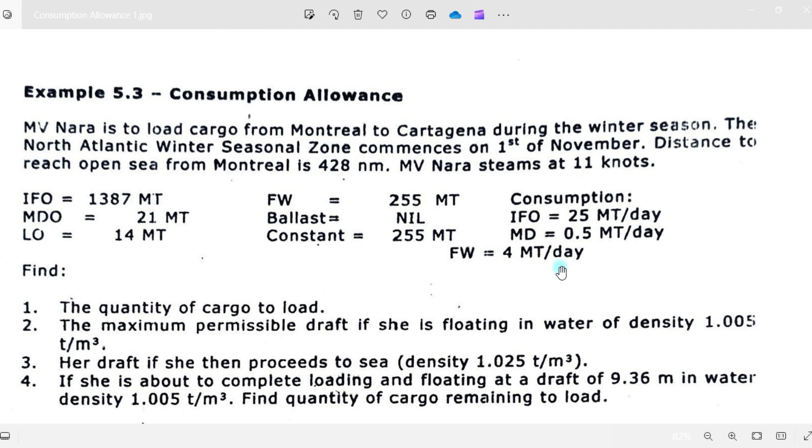Okay, this is the question. Find number 1, the quantity of cargo to load, meaning the maximum cargo to load when he is at the loading port. The maximum permissible draft if she is floating in water of density 1.005.

So what will be her draft if she floats in dock water of density 1.005? Her draft if she then proceeds to sea density of 1.025 - what will be her draft when she floats in salt water of density 1.025?

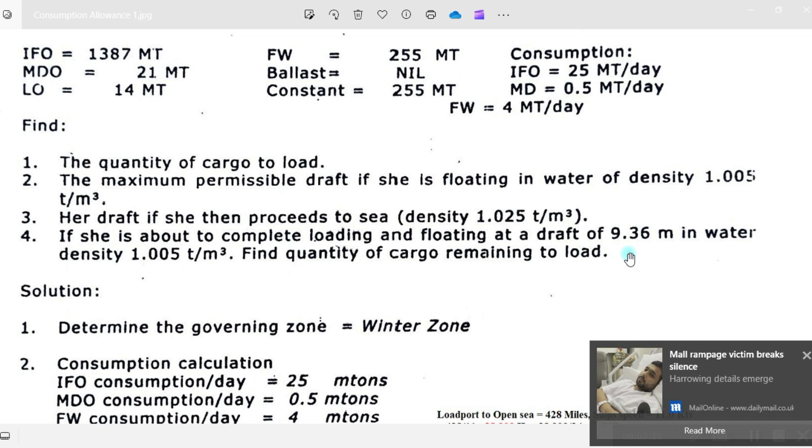If she's about to complete loading and floating at a draft of 9.36, meaning she will stop loading at 9.36 to get the remaining cargo, the local density or dock water when she reaches 9.36 meters is 1.005 tons per cubic meter.

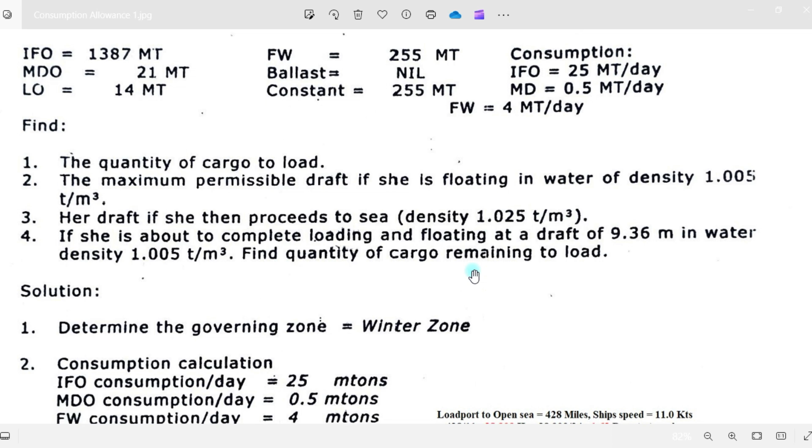And find the quantity of remaining cargo to load. So what will be the remaining cargo to load? Solution.

Determining zone: it is winter zone. So winter zone will be here, and this maximum draft will be 9.351, and displacement will be 30183. Okay, his light ship is 6772. So that will be the winter zone.

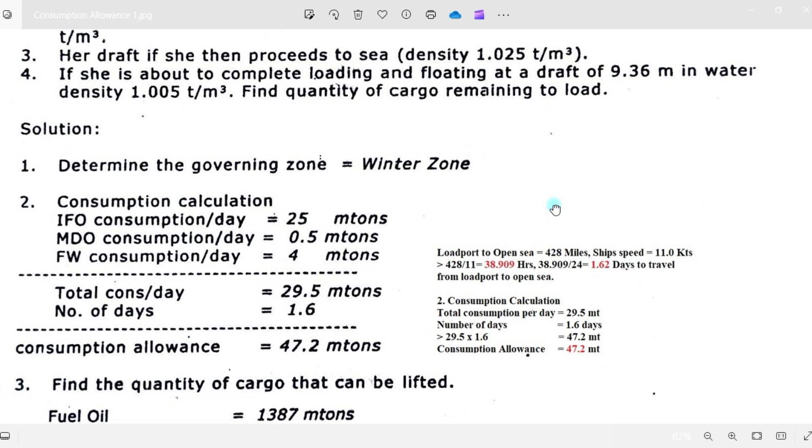Consumption calculations. FO consumption per day is 25 tons. DO consumption per day is 0.5 tons, and freshwater consumption per day is 4 tons. So you total all the consumptions, then total consumption per day will be 29.5 metric tons.

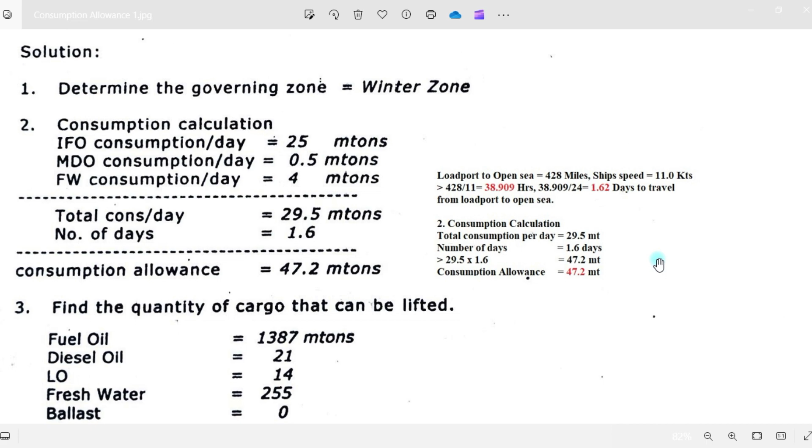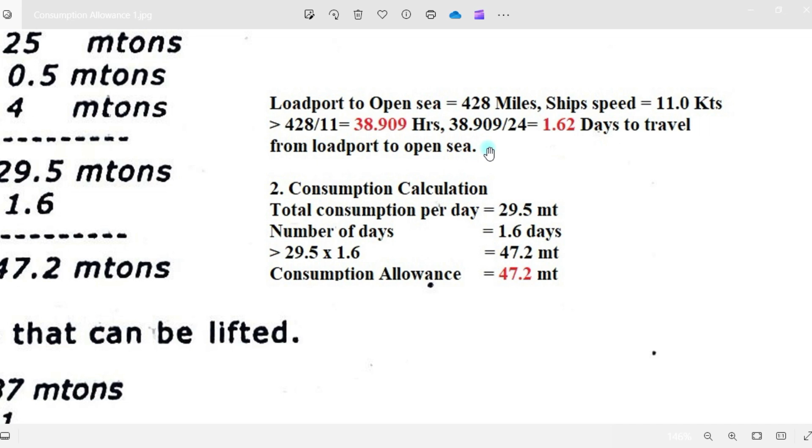Let's make this a little bit bigger. Okay, so load port to open sea, the distance is 428 miles and she has a speed of 11 knots. So with this distance from load port to open sea, you divide it by the speed of the vessel, which is 11, so that will be 38.909 hours. So with this number of hours of 38.909, divide it by 24, and you will have 1.62 days to travel from load port to open sea.

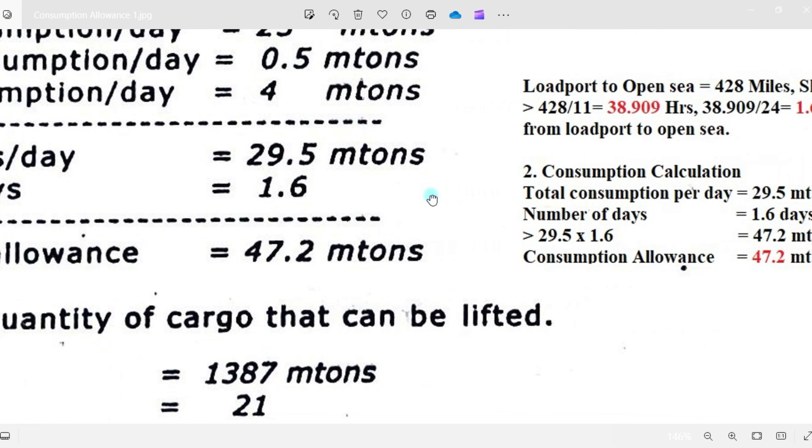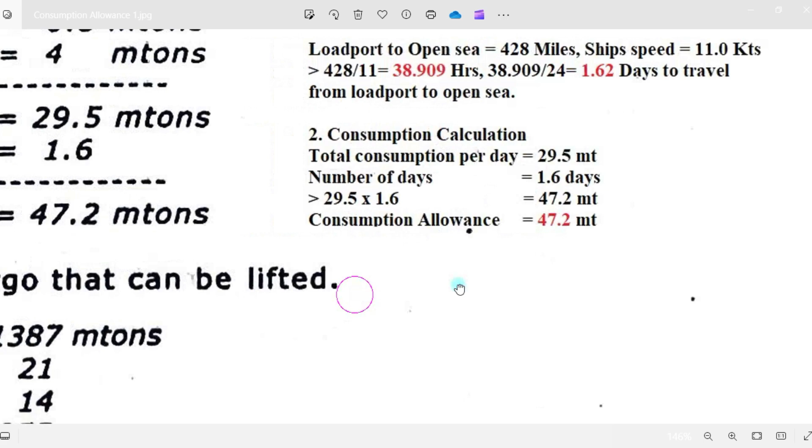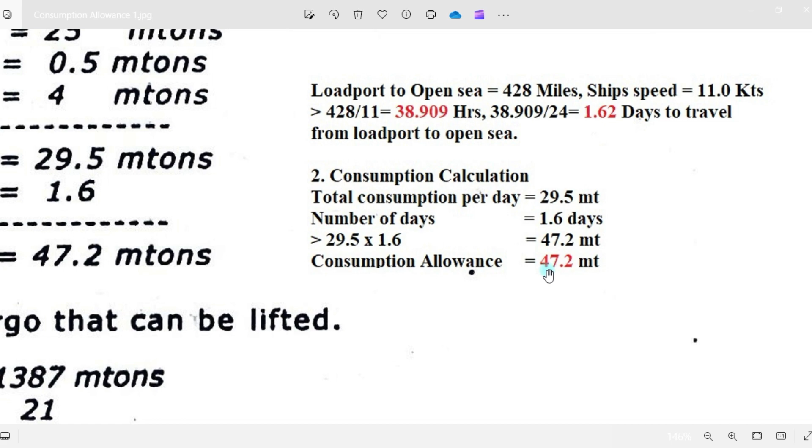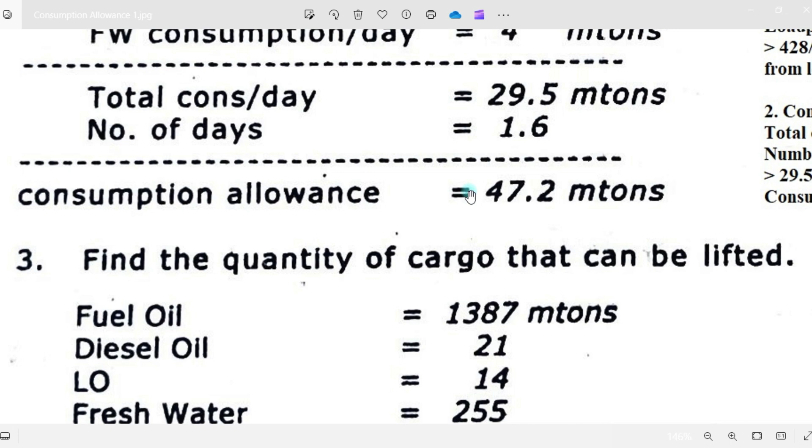Consumption calculation: total consumption per day is 29.5, and the number of days to travel from load port to open sea is 1.6 days. So the total consumption times number of days to travel, you will have total allowance of 47.2 metric tons. That will be what we call consumption allowance. So 29.5 multiplied by 1.6, you will have a consumption allowance of 47.2 metric tons.

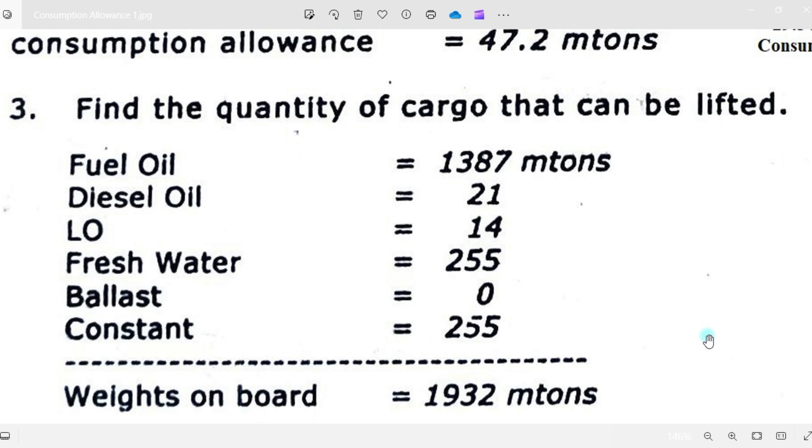So find the quantity of cargo that can be lifted, meaning add all the ROBs, your remaining on board. So fuel will be 1387, diesel oil is 21, lube oil is 14 tons, fresh water is 255, ballast 0, constant is 255. So a total weights on board is 1932. That will be your ROB.

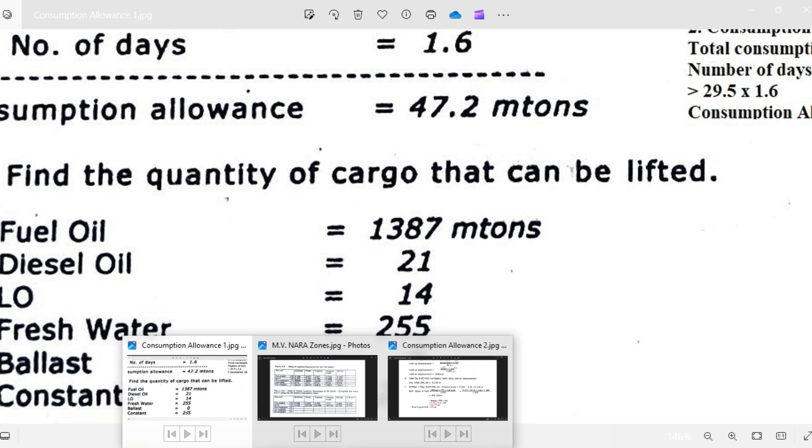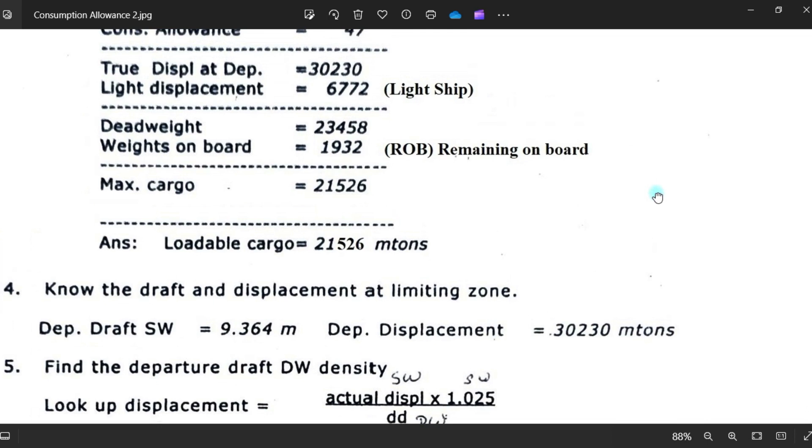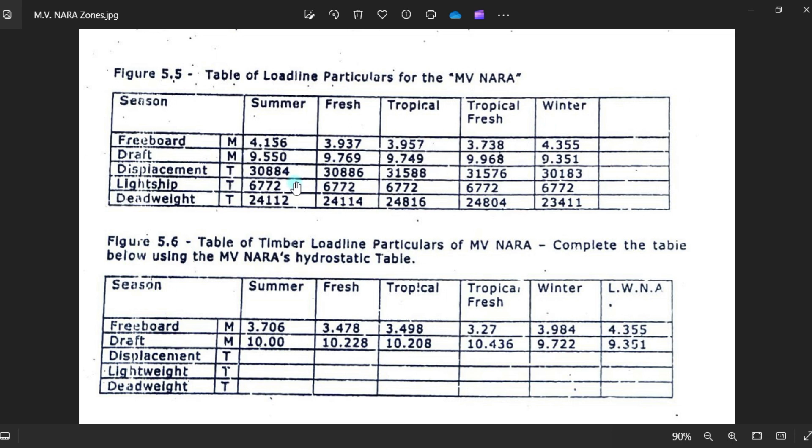Proceed here. Make this a little bigger. So what will be your winter displacement, which is 30183? Check again. Displacement, I'm sorry, your displacement for winter is 30183.

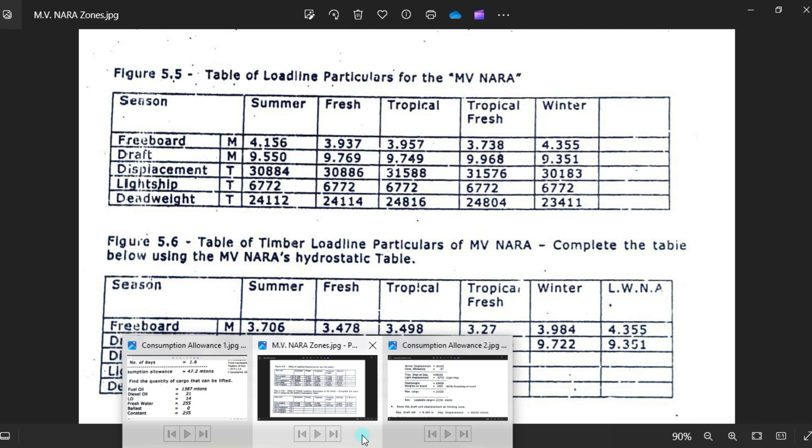Which is this one, plus your allowance of 47, consumption allowance 47 - you add this one, that will be your true displacement at departure. So that will be 30230. So you add this one, you have a total of 30230. That will be your true displacement at departure, minus your light displacement or your light ship. You deduct this one, your dead weight will be 23458, minus your weights on board or your ROB, which is 1932. Your maximum cargo to load is 21526. So the answer for the maximum cargo to load, loadable cargo, is 21526.

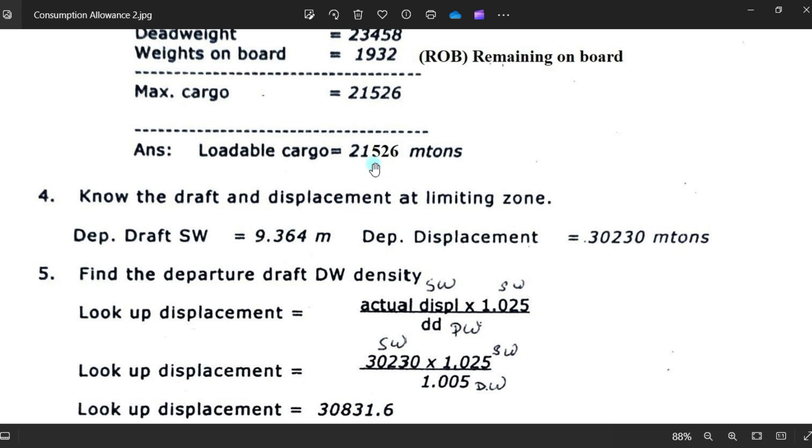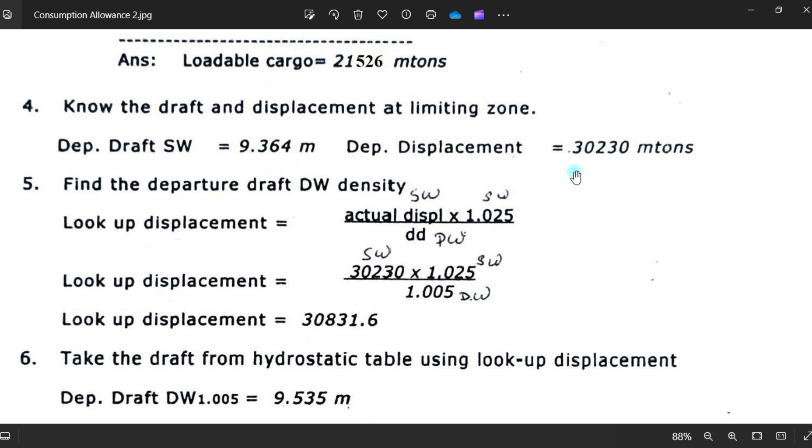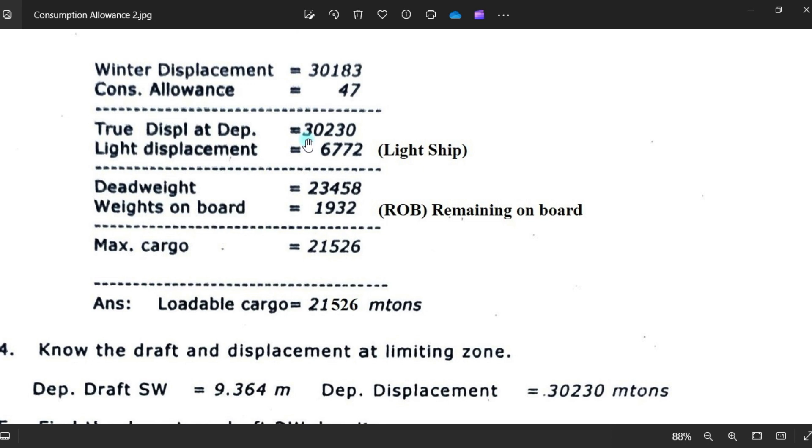Okay, then go to number 4. Know the displacement, draft and displacement at the limiting zone, meaning near the winter zone. So since you have this departure displacement, which is this one, this will be your true displacement at departure, which is 30230, which is this one. What will be the corresponding draft of this displacement? So we will check 30230. So 30230, we check here, 30230.

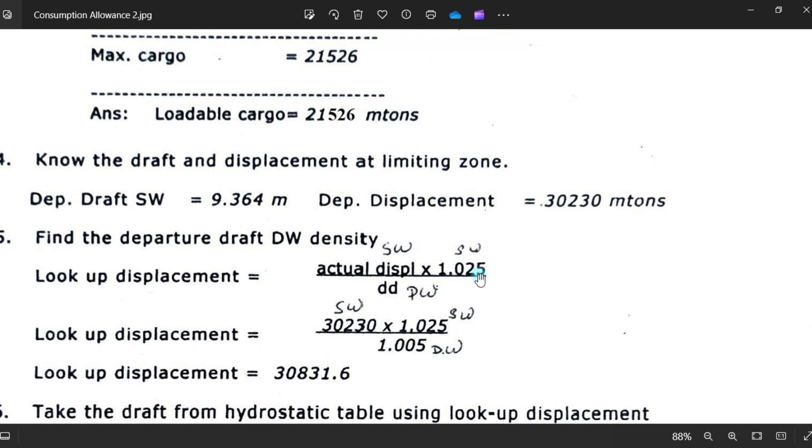The corresponding draft will be 9.364, taken from the hydrostatic table, so this will be in salt water. You convert this to dock water, apply the local density of 1.005, and you will have the displacement of 30831. This is the formula: actual displacement, which is 30230, times your constant density of 1.025 over your dock water density of 1.005, and the value will be 30831.6. So the corresponding draft of this one is 9.535.

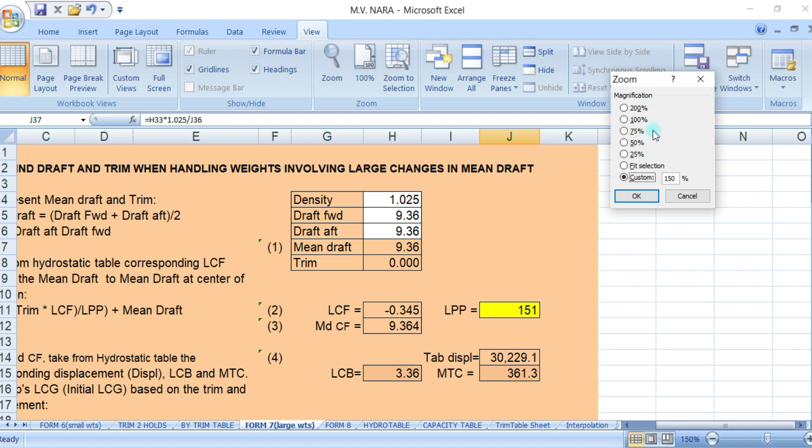Okay, we will check, guys. Go to 7, go to 100, and 75, 175.

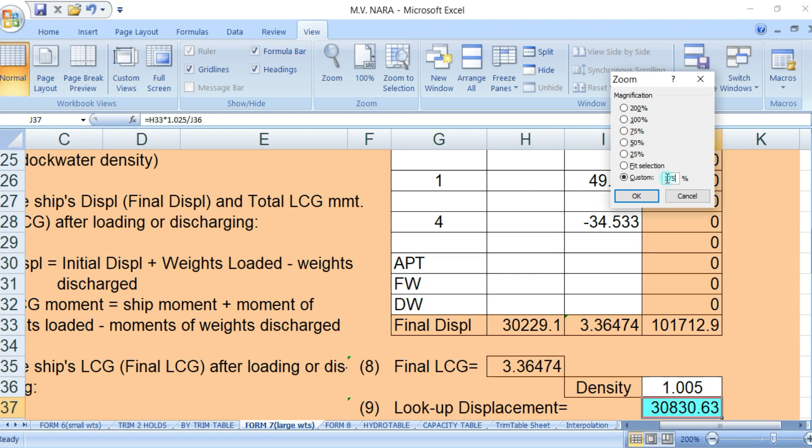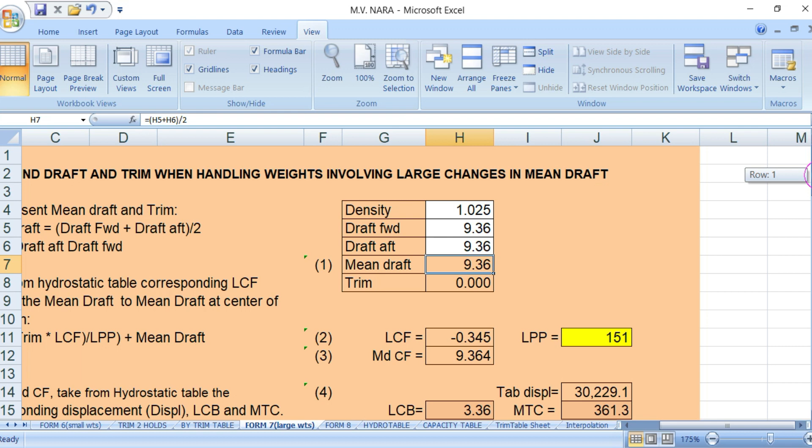So what was the draft, guys? The density would be 1.025, and the draft was 9.364. And the corresponding displacement would be 30229, but the figure here is 30230, so almost the same with this draft.

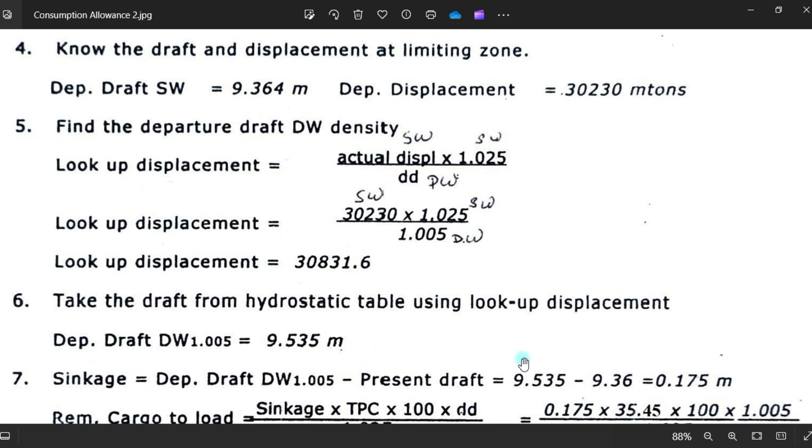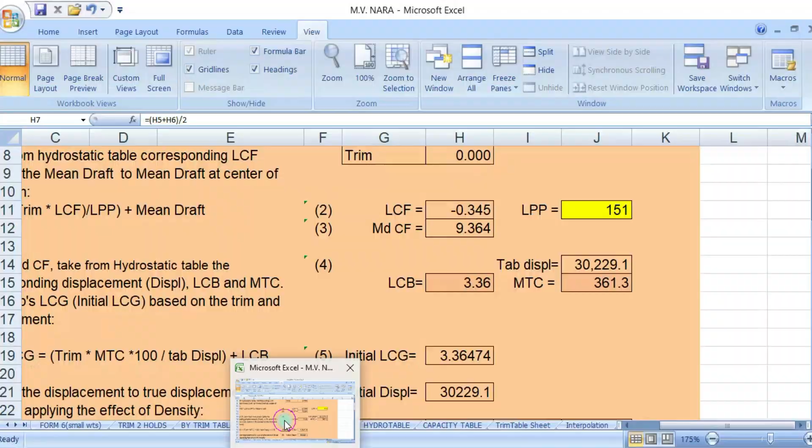So we convert that to the dock water of 1.005. What will be the corresponding draft displacement? I think this one, okay, we'll check. Put here 1.005, the corresponding displacement will be 30830, okay, check.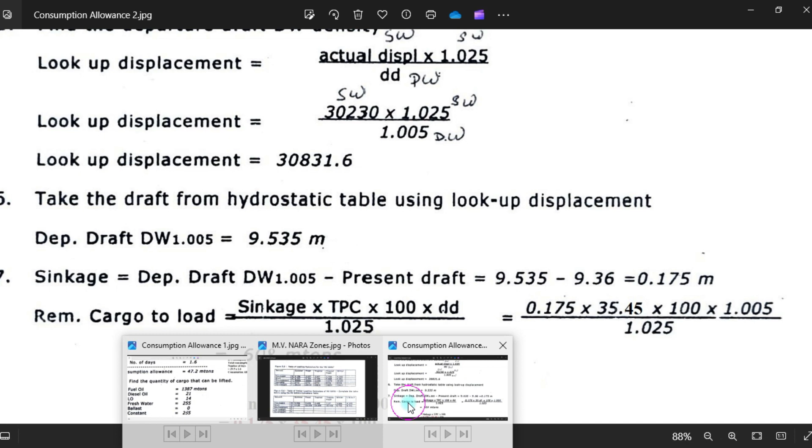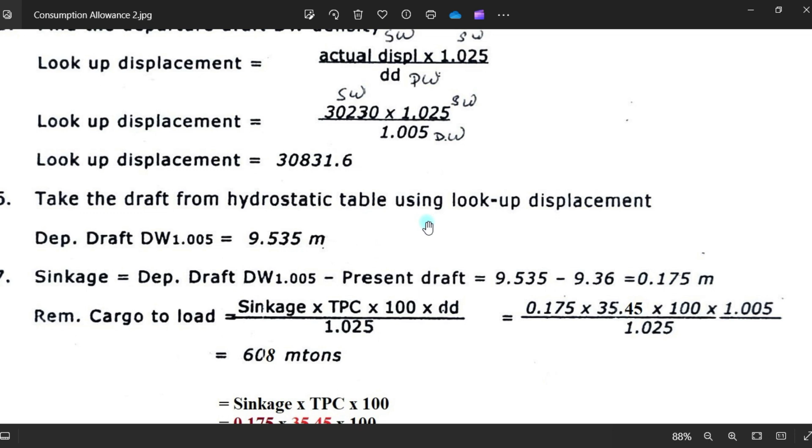Corresponding displacement will be 30831, 6.31, that will be almost the same, 30831. If you round up this one, it will be 31, and the corresponding draft is 9.535.

Now the next thing we will do, number 7, is to get the sinkage. So the sinkage formula is departure draft dock water of 1.005 minus your present draft. This departure draft of dock water 1.005 is 9.535, and your present draft when you stop loading, because you will compute for the cargo remaining to load, is 9.36. So you deduct these two, you will have a sinkage of 0.175 meters, meaning the vessel has to sink 0.175 meters, so he will reach the departure draft of 9.535.

So you have already now the sinkage done, then you will get the remaining cargo to load, and this is the formula. The formula says sinkage times TPC times 100 times your local density over 1.025. To translate: sinkage is 0.175 times your TPC of the departure draft. So TPC of 9.535 is 35.45, times 100 times your local density of 1.005 over constant of 1.025, so your remaining cargo to load is 608 metric tons.

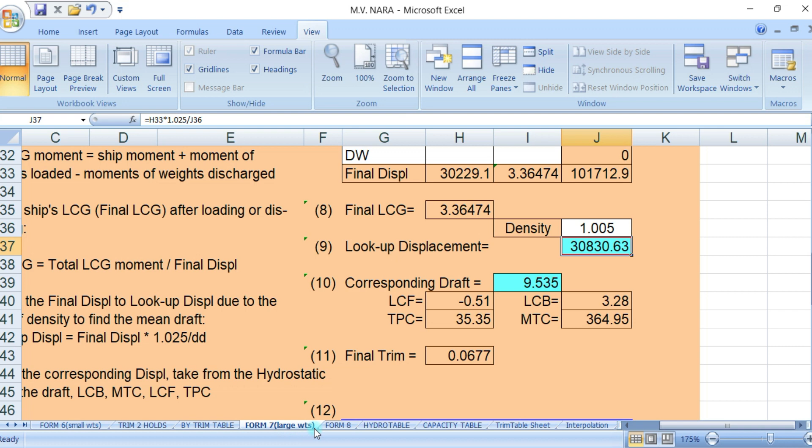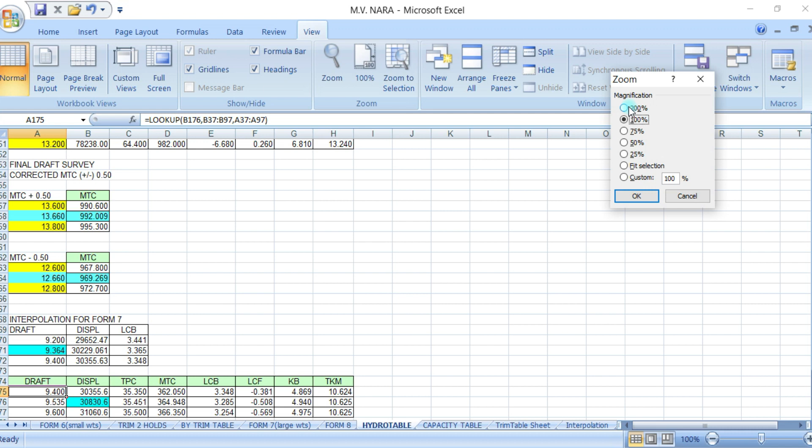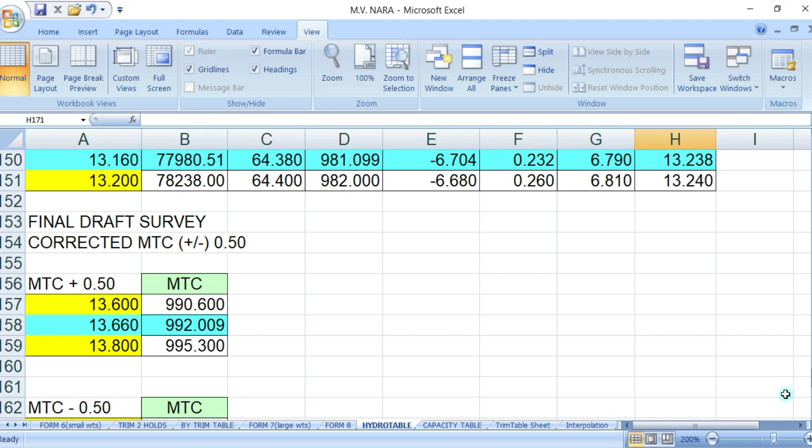Okay, we'll check this, guys, the TPC of this departure draft of 9.535. So here, 9.535, the TPC is 35.35. Check again. Let's see, we'll check. Here you guys, 9.535, TPC is 35.45. See, draft is 9.535, the TPC is 35.45, so check again.

So 35.45, so you will have remaining cargo to load of 608 metric tons. But according to my program or my loading program, the formula should be sinkage times TPC times 100. So let's investigate, guys. Sinkage, let's say, is 0.175, which is this one. TPC of this draft, departure draft, is 35.45, which is this one, times 100. Then you will have a figure of remaining cargo of 620.375, or 620 metric tons will be your remaining cargo to load.

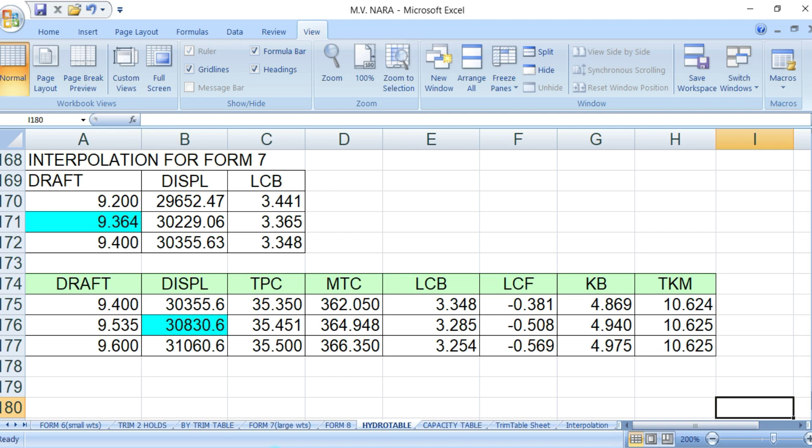So let's investigate, guys. The draft when you stop loading to check the remaining cargo is 9.36, that's where you stop your cargo. Is that correct? I think so. Yes, 9.36. Yeah, 9.36. So your draft will be 9.36.

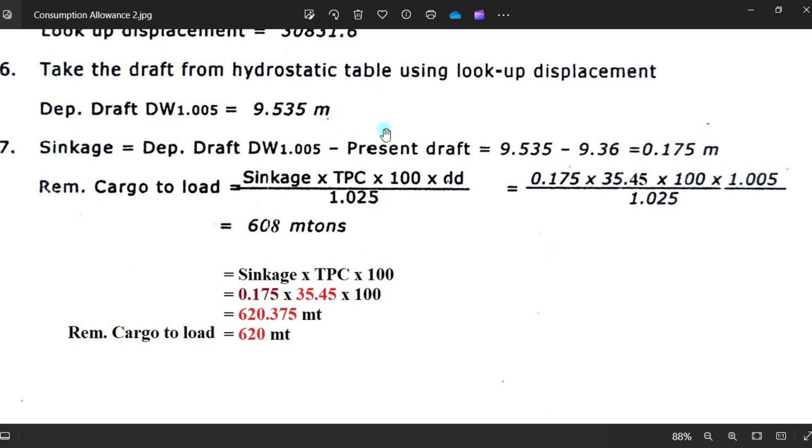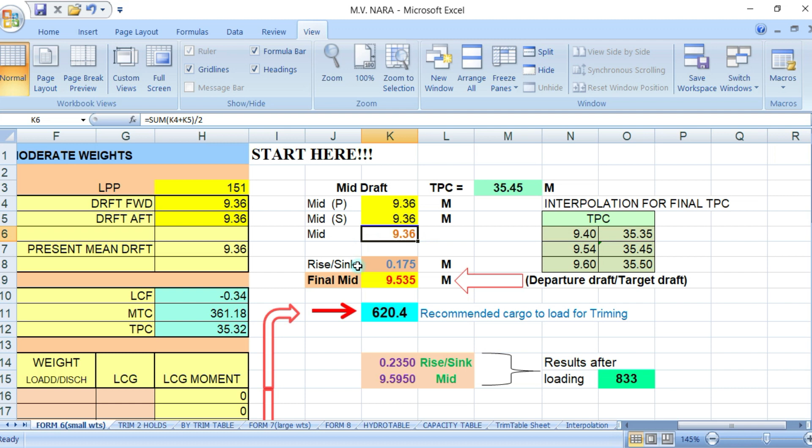And when you take your draft, always make a point that you will have to take your actual mid-draft port and starboard. So port will be 9.36, assuming there's no list and there's no trim. So that will be your mid-draft, and your final departure will be 9.535, because your displacement is 30831. That corresponds to your departure draft of dock water 1.005 is 9.535. So the departure draft is 9.535, so your sinkage will be 0.175. It's the same.

Now I will show how to get this remaining cargo to load in my program. Okay, go to the program, just go down here.

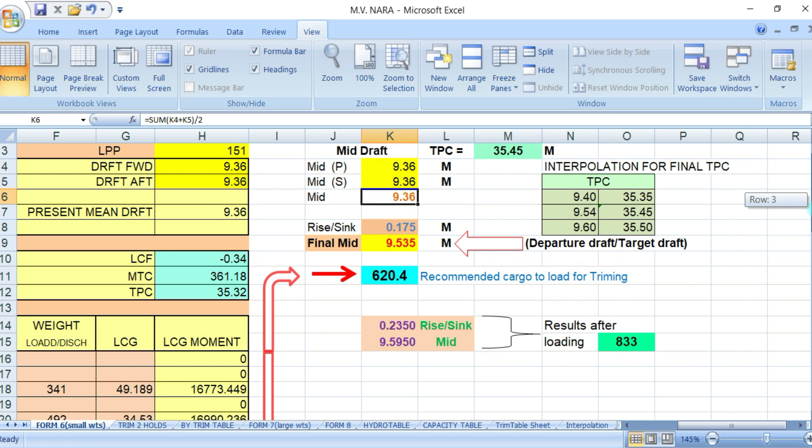So you click this one. The formula says K8 times 100 times M3. So K8 means K and 8. This is the sinkage, which is 0.175 times 100 times M3.

TPC of the departure draft, which is 9.535, corresponds to TPC of 35.45, which is this one. So M3 is this one.

So the value of these figures will be 620.4. Okay, so I got here 620.4, to round it up, in other words 620.

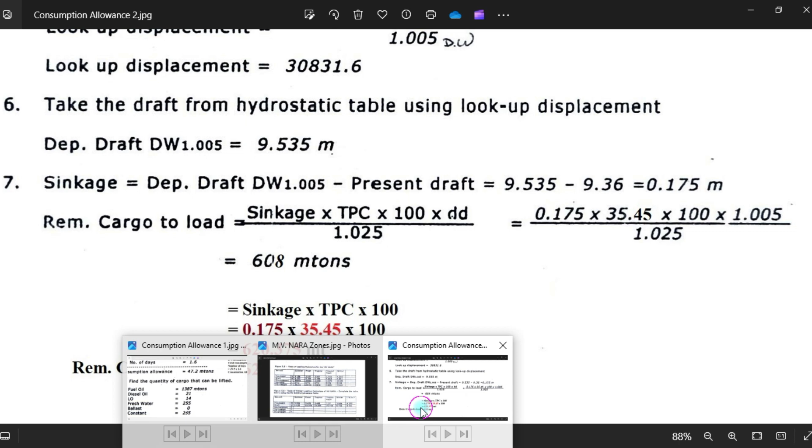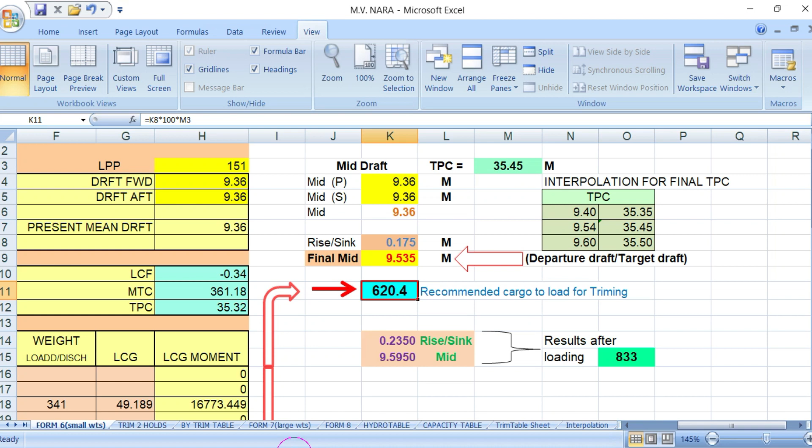So the problem stops from here. It's only asking for how much remaining cargo to load, but we can continue as per the program that I have, since you have already the cargo to load, remaining cargo to load.

So since this is a 4-hold vessel, I will try to trim the vessel and load the cargo in hold 1 and 4. So what happens if you load 620? I put here, just follow this arrow here, put 620, and here he goes 620.

What will be his mid-draft? Mid-draft will be 9.5349, which is almost the same. If you round up this 49, it will be 5, so it's the same. And the sinkage is 0.1749, almost the same with the sinkage here. If you round this 49, that will be 0.175. Okay, so it will be the same.

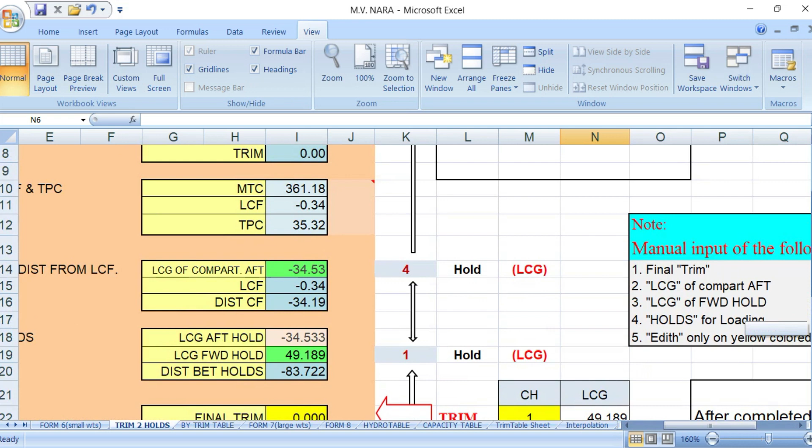Now we go to trim 2 holds. Trim 2 holds is here, and there he goes. Trimming cargo is 620 and 620. So let's say I want to make it even keel. I will put 0 here.

And how much would I load in number 1? Number 1 will be 253 and number 4 will be 367. So I will just put here 253 in number 1, and number 4 will be 367.

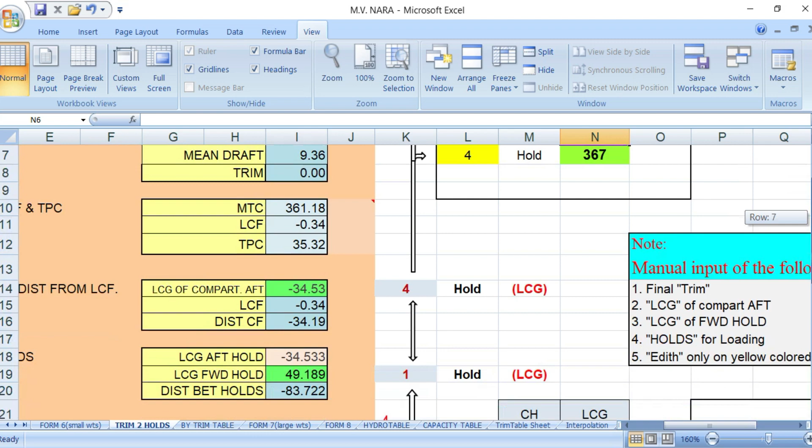Okay, so what will be the corresponding draft? Forward draft will be 9.54, aft draft will be 9.53, the trim will be 0, and your mean draft will be 9.535, which is this one, and your mid draft will be 9.534, which is this one. Okay, so you have a 0 deflection, so that's good.

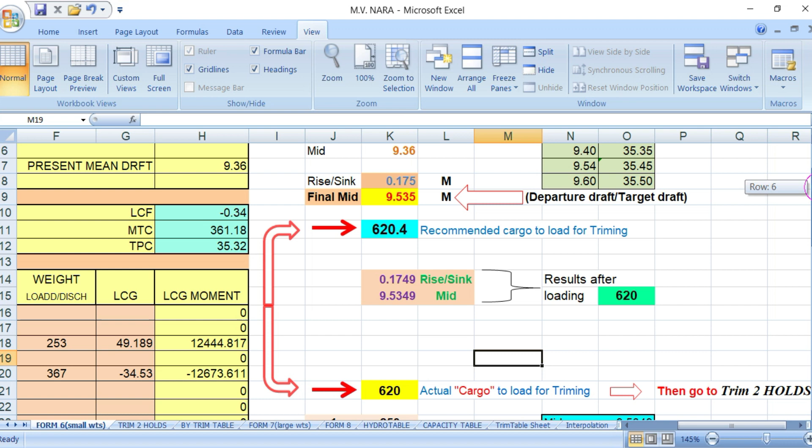And we'll see the other table. See, now in hold number 1 you load 253, and hold number 4, 367, which is the same with this one. So you have a total of 620, and your final draft will be, forward will be 9.54, your aft will be 9.54, which is 0 trim, even keel.

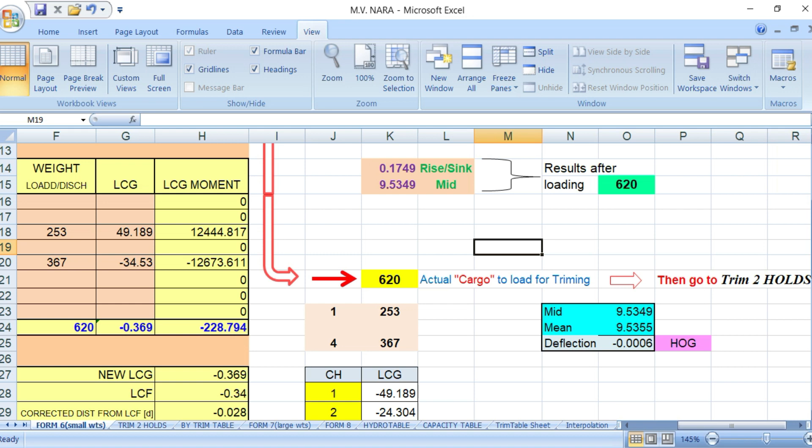And your mean draft will be 9.535, which is this one, and your mid draft will be 9.5349, which is this one. So we have a deflection of 0.

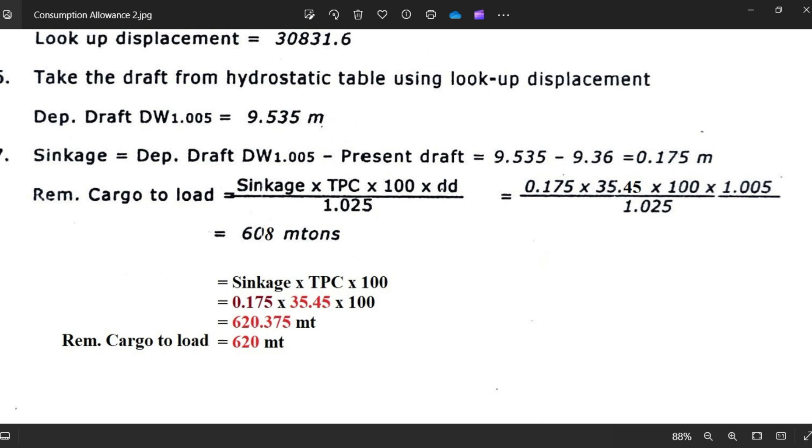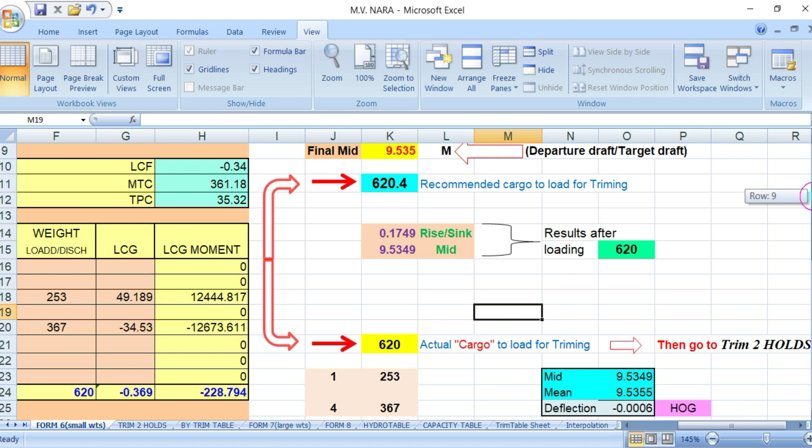Guys, I would prefer this formula, because exactly you will have the same mid draft. See, your mid draft here is, when you load 620, your mid draft will be 9.5349, so almost the same with this one. Okay, and your sinkage almost the same with this one.

What if we try to load 608? What will happen? So 608, your mid draft will be 531, 535, so almost the same, small difference, and your sinkage will be 175, you have 171.

Okay, so what happens, it will load 608, then we go to trim 2 holds, say 608. Okay, 608, and you still have even keel. So what will be in your hold number 1? Hold number 1 will be 248, and up will be 4 will be 359. So let's say 348.

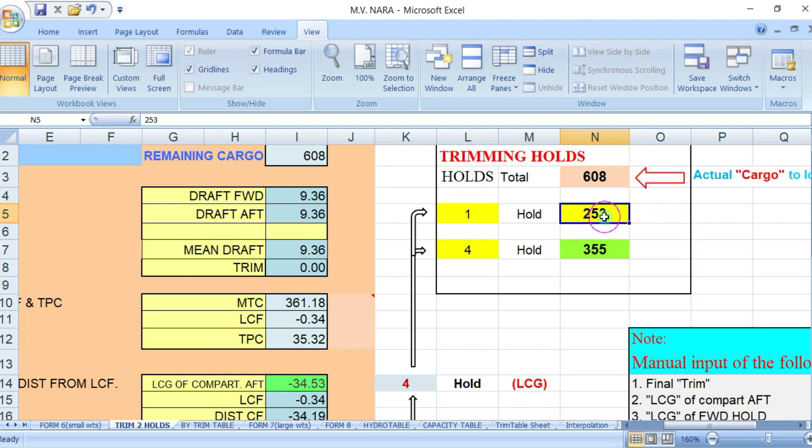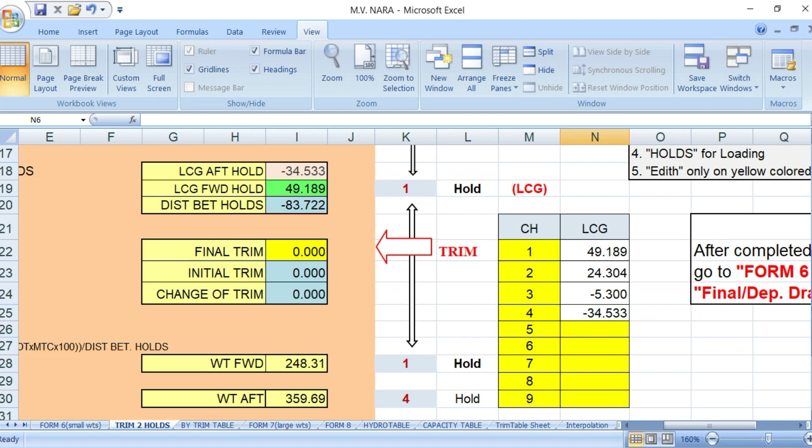348. Is that 348? 248. 248, and your cargo hold number 4 will be 360. Okay, 360, and your final draft forward and aft will be 9.54, forward and aft will be 9.53. You have a 0 trim, and your mean will be 535, and you still have a deflection.

So let's see on the other side. Your hold number 1 will be 248, which is the same, and your hold number 4 will be 360, which is the same, and you have a total of 608.

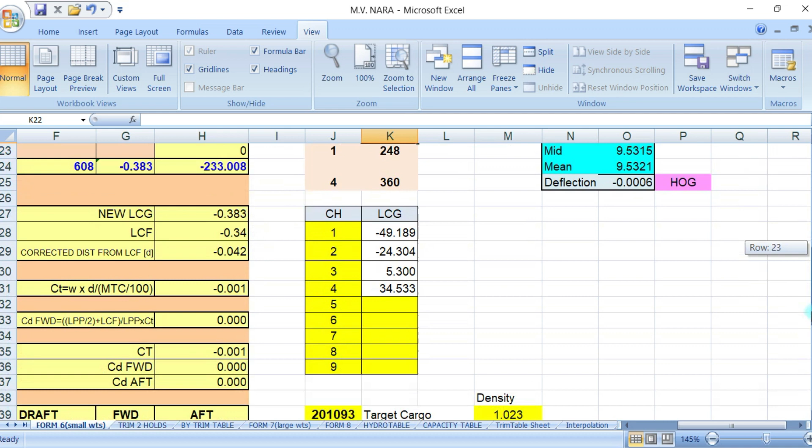And what will be your final draft? Forward will be 9.53, aft will be 9.53, you have zero trim, and your mean will be 9.532. So it should be 535, and we still have an even keel.

But I would prefer 620. So this is the departure draft should be 535, okay, but you have 531, 531. So I would say 620, and you will have almost the same mid draft and sinkage, okay.

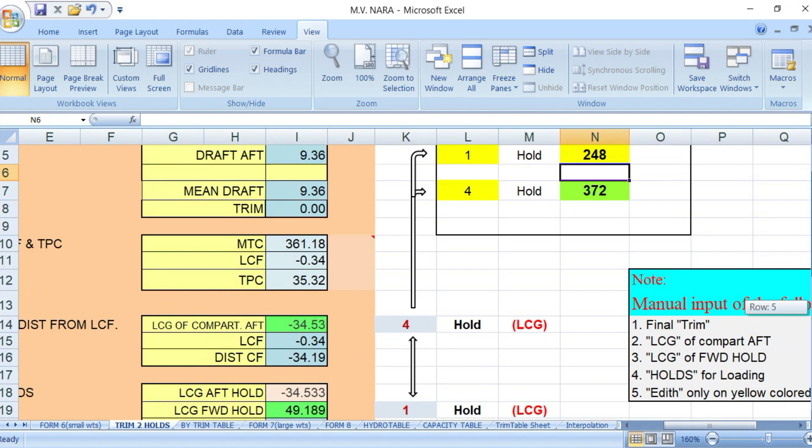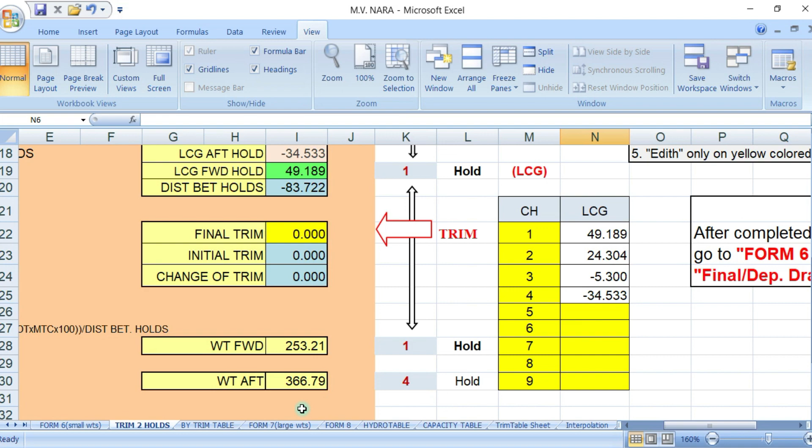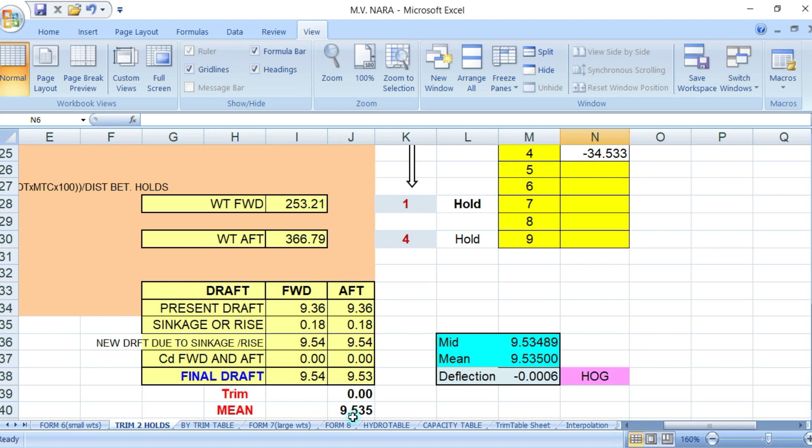And go back to trim 2 holds. Number 1 will be 253. I put here 253. Number 4 will be 367, and your final draft will be forward will be 9.54, aft will be 9.53, you have trim 0, and your mean draft is 535, and you have a 0 deflection.

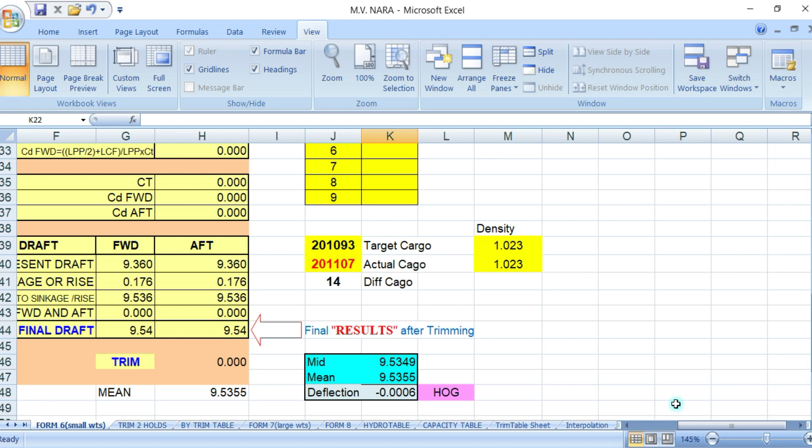On the other side, your forward or number 1 hold is 253, which is this one. Number 4 is 367, which is this one. You have a total of 620, and your final draft forward will be 9.54, aft will be 9.54, you have 0 trim, and your mean draft is 535, this one. So this is more accurate than 608.